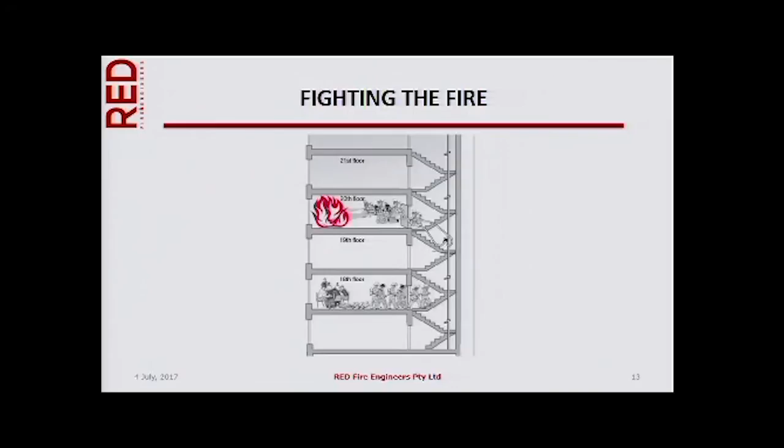In Grenfell, if you read some of the first accounts by the fireys, they talk about getting up to the 15th or 16th floor and running out of air, then having to go back down to get another air bottle to go back up to the 15th floor. How are they supposed to get higher up and rescue people? They said to themselves, do I keep going without oxygen and have to be rescued myself, or do I just leave those people to themselves? Some fireys went up another 2 or 3 levels and then gave up. Can you blame them? Of course not. That's the challenge of fighting fires in these buildings. Our normal way of fighting a fire is setting up 1 or 2 floors below the fire floor. We can't do that with these facade fires.

So this is Melbourne—this is home, we don't have to go overseas. By the way, this is not our first facade fire. I found pictures of facade fires in the early 90s in Sydney. Bankstown—you remember the Bankstown fire a few years ago where the 2 girls jumped? One died, one became a paraplegic. Do you know that last year they had a facade fire? The front of their building was an aluminum composite panel. It had another fire. Luckily, it was set back from the tower, so the fire didn't go anywhere. We have facade fires right here in our backyard.

My colleague Blair Stratton was taking the train into the city on the 25th of November because he was giving that talk with me at Engineers Australia. I said to him, when you're at Southern Cross, lean out the window and take a picture for me so I could add this to my slides.

This was a horrific fire in some ways, but not so bad because no one died. Some would argue that it shows how amazing our building regulations are - the purpose is to save lives, and no one died, so the building regulations were fine. Or did we get lucky?

We had so many challenges in this fire. There were 400, 500, we don't know how many people were in the building. Can you imagine a 2-bedroom apartment with 12 occupants? Can you imagine bunk beds with a time schedule on the bed for what shift people are going to sleep? Welcome to Melbourne - I hope none of you are living like that. Don't raise your hands if you are.

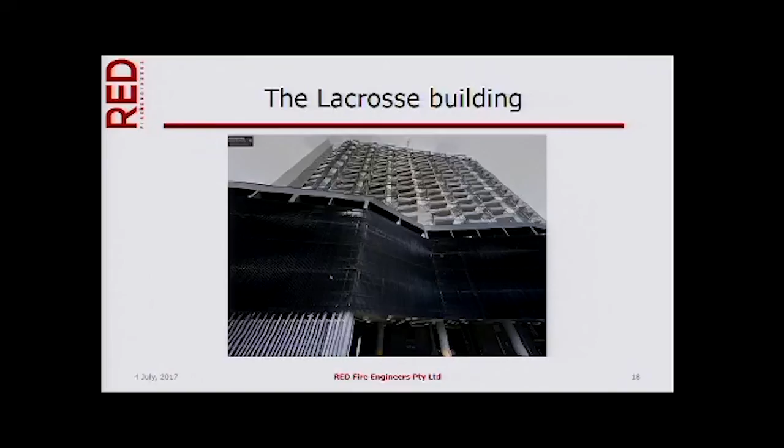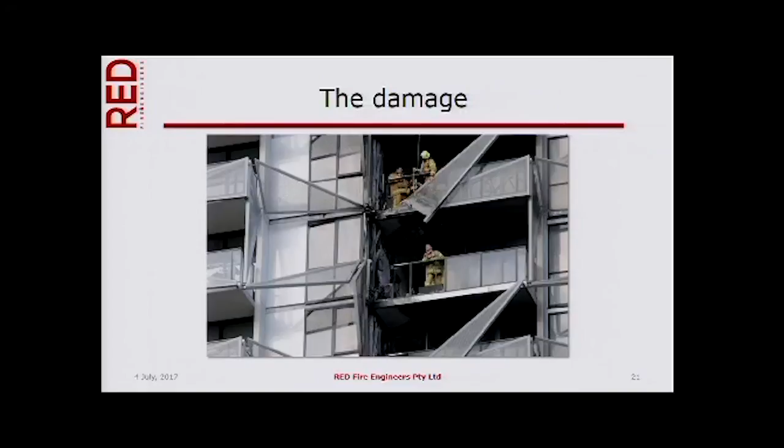The brigade had its challenges dealing with the aftermath. We're going to come back and look at these pictures because they tell a lot.

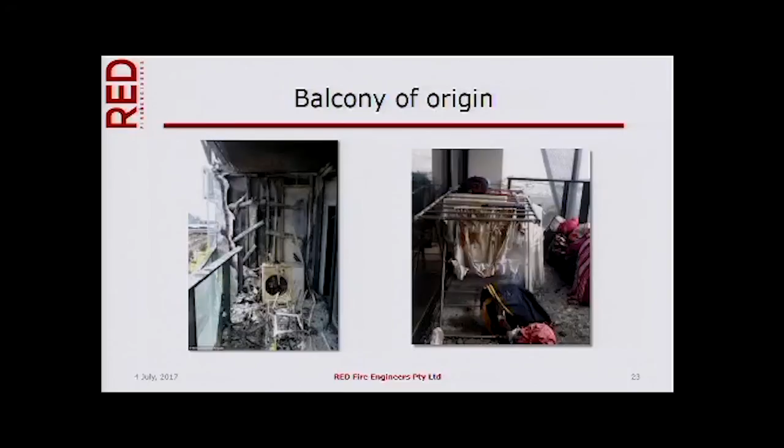After the fire, they took the pieces of aluminum - pretty stuff. I hope no one from the architectural firms is here, but if so, I'm insulting you, I apologize. The stuff that makes buildings pretty is not of great interest to me as an engineer, other than the engineering to keep it up and keep it safe.

They don't have a glass balustrade problem on the left - they have a plywood balustrade, which is sort of interesting. Is that livable? Well, you can't fall out, so I guess that's all right. Should we put people behind plywood balustrades? Why not?

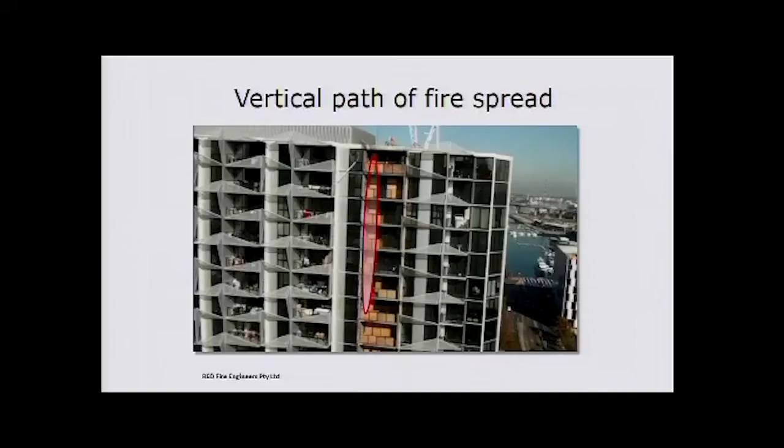So the fire actually went up - see where that red oval is? The fire went up sort of in that area. That's why you see all the plywood balustrades. That red arrow is pointing to the corner of the aluminum composite panel facade where the fire was able to go from its origin all the way up to the top of the roof.

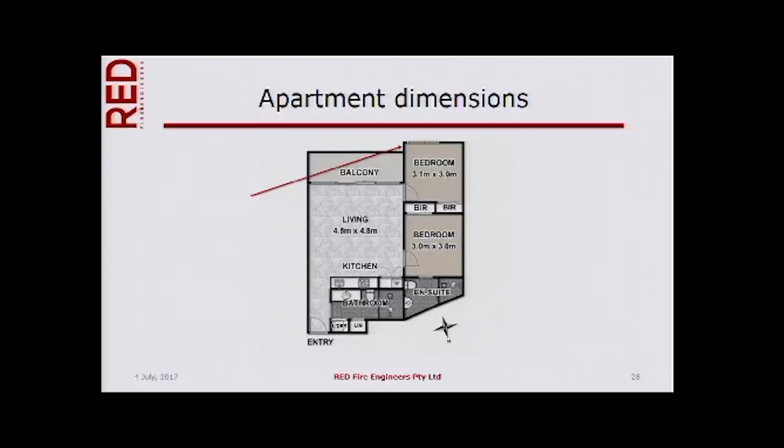You get a better handle of that, and you get an idea of the size of the bedrooms - fairly large for Melbourne these days. That was funny, no? All right.

The building is sprinkled - where are the sprinklers? The sprinklers are below the ceiling. The combustible ductwork is above the ceiling, between the ceiling and the floor slab, so in this interstitial space.

But that's okay, because a fire in the living area would have to bypass the sprinkler system to get up into that space, unless the fire started in the balcony and then entered through this grill. Oh, I hadn't thought about it. It won't get into that grill unless there's a fire source out there, such as a combustible facade.

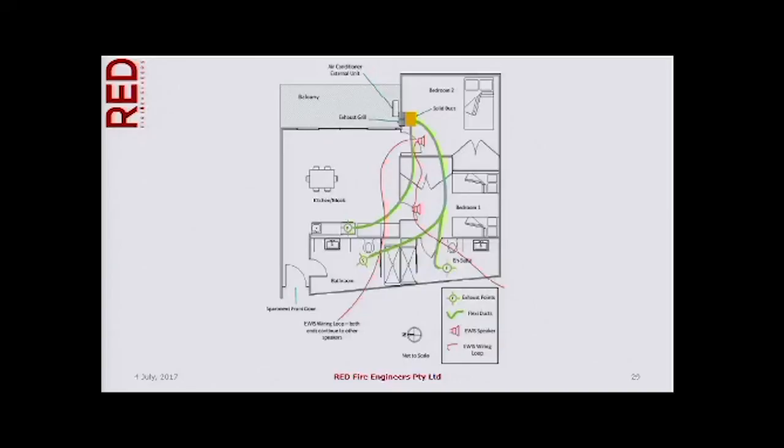In my building, which is also in Melbourne, the same fire engineers said, look, we're not worried about a fire getting into that space, so we don't have to have any fire resistance between one apartment and the next because it's sprinkled and there's a ceiling and we can't get above the sprinklers with a fire. So we'll just put a little smoke separation. We won't actually seal the penetrations. It's not a problem in Melbourne. I think Lacrosse says it is a problem. Interesting.

The building was sprinklered, and there were sprinklers in the important rooms. So if you think about a fire that started in this balcony, if it burns through the wall behind the air conditioning unit, you've got a sprinkler head to control it, which is great. If it breaks through the glass, you've got a sprinkler head here to control it, and that's great too. We'll come back to the sprinklers.

One of the things you read in the press is that our buildings in Australia can't have the London fire because we have sprinklers everywhere. Well, if the building's over 25 meters, we might have sprinklers. Not all buildings over 25 meters do, but most of them.

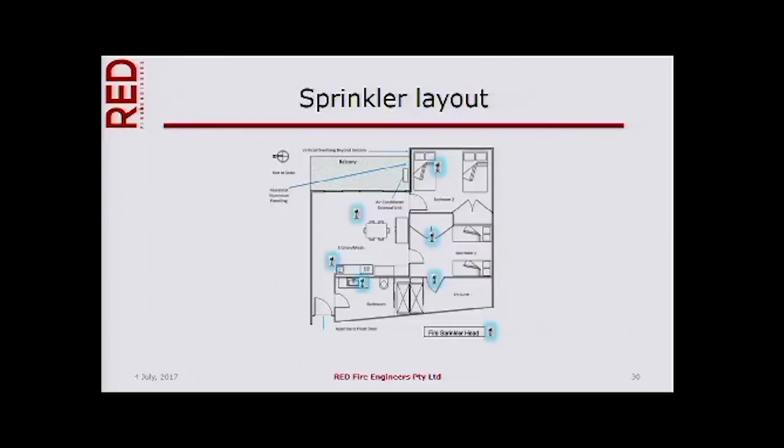So how did the fire start? Well, without mentioning names, the builder says it's the guy who started the fire that caused all the problem. At least that's what the newspaper says. An occupant was sitting out on the balcony smoking, and he put his cigarette out in an ashtray. The ashtray happened to have been made of a yogurt container.

He'd been using that yogurt container all his life. If you know anyone who smokes or have ever smoked yourself, have you ever seen anyone put a cigarette out in a plastic container? Come on, raise your hand. Thank you, lots of hands go up. So is this an unusual thing to use for an ashtray? No. Is this something we should expect? Of course. This is how people live. We should be designing how people live, not how we think they should live.

All right, fire started. The ashtray, the yogurt container, melted. The contents spilled, and a little bit of flame ignited some papers. Oh, terrible, he's a slob. He left paper everywhere. You've never left a piece of paper on your balcony, have you? Well, I have. I'm a slob. I told you that already. The fire got behind the air conditioner, ignited the cladding behind it, and that's all it took.

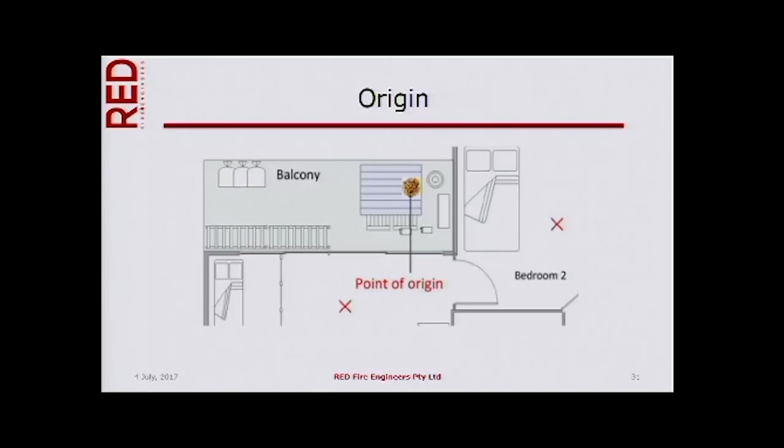We'll come back to that in a second. So this is what the apartment sort of looked like. Here's the air conditioner. The fire got behind there. Not bad looking apartments. Not bad until you have the fire.

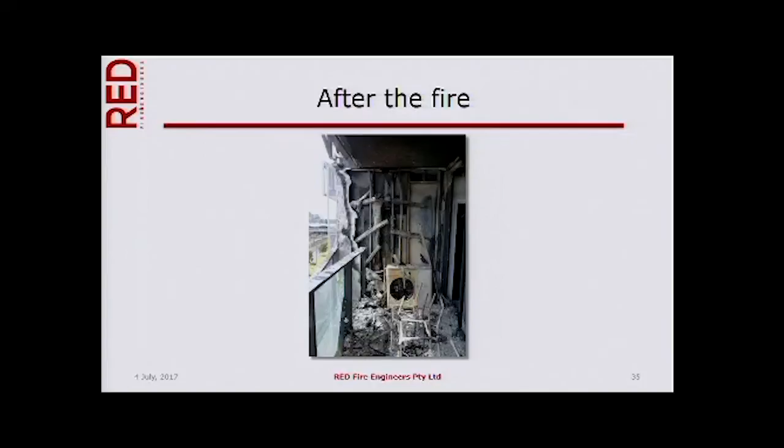All right, you can see through into that bedroom. So there was cladding, some insulation, plasterboard, and fire burned through that, got into the bedroom, the sprinkler stopped the fire. All's good, except the fire got into this cladding and went right up to the top of the building.

Do you expect values to decrease if people know there's been a fire in your building and it's in the paper? Absolutely. If they know your building has a non-compliant facade, do you think you can sell your apartment for as much money as before they knew it was non-compliant? I can tell you from my building, that's exactly what has occurred. What is the cost? For Lacrosse, $6.5 million of fire damage, including $700,000 of water damage. So those bloody sprinklers put water everywhere.

26 sprinkler heads operated. How many heads do we expect to operate before we normally run out of water? 8 to 10, even in a combined system. Wow, how come they still worked? Well, they worked because the fire was at 2 in the morning. No one in Docklands is using water at 2 in the morning. Guess what time people start using water? Around 7 a.m. when they get up.

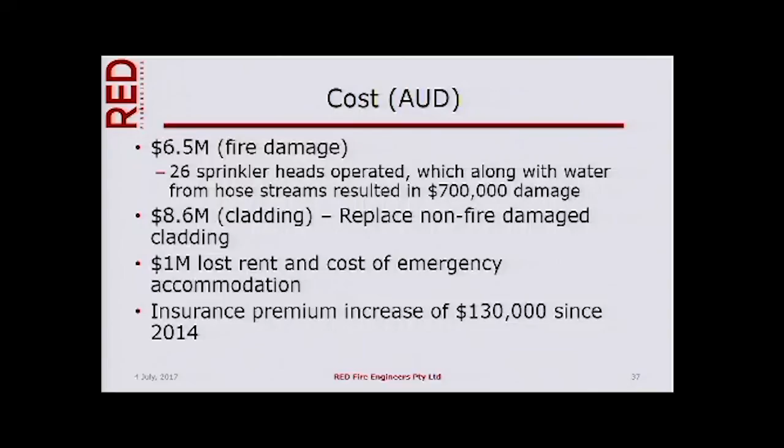What are the other costs? $1 million in lost rent, cost of emergency accommodation, $8.6 million in cladding costs. Insurance has gone up an increase of $130,000. In my building, which has 324 apartments, the Owners Corporation's insurance this year is going from $35,000 to $70,000 because of non-compliant cladding. And we hear that time after time after time.

All right. So this is a Class 2 occupancy. We need Type A construction to meet the deemed to satisfy requirements.

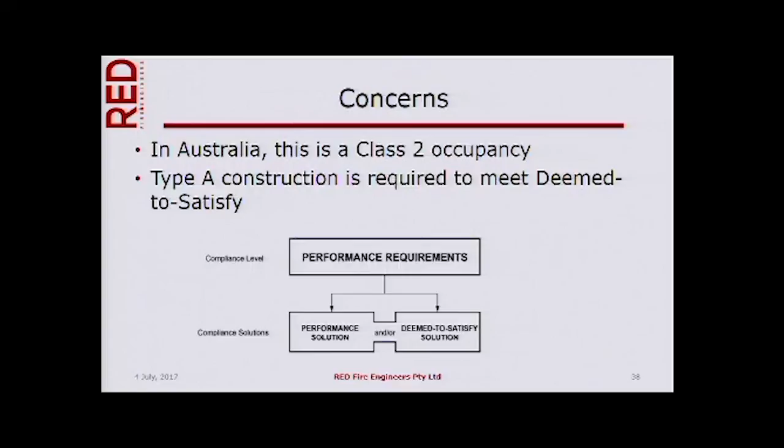I'm just going to take a second to remind you there are two ways of meeting the performance requirements of our building regulations. One is through a performance solution, and the other is through a deemed to satisfy solution. The deemed to satisfy solution is the only one that tells you how to build things. The performance solution is something a fire engineer comes along with, and says, in order to meet the performance requirements and expectations of society, and of the building code, here's how you can do it. I'll come back to that again in a minute.

All right, you all want to know about Grenfell Tower. As I promised you, I'm not going to tell you anything you can't find online. I wish I had more information. I don't at the moment.

Do we do that in Australia? No. We do not build buildings structurally the same as they do in the UK, with a few exceptions. There are engineering firms who particularly practice internationally—Arup, for example, is one—and their designs will really look at the performance requirements and do what's needed. But all too often here, we do the minimum that's needed, what our building regulations call for.

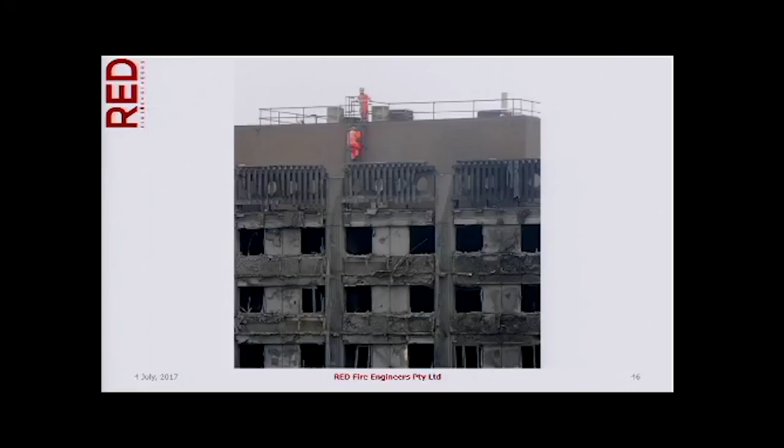There are two absolutely great articles in the New York Times. Just look up Grenfell Tower, June 24th. That's all you have to remember. Or you can take a picture like he did.

Nate, I don't know. Bloody Americans. Thank you.

These are really, really good articles. They're written by the same reporter who wrote most of the articles in the New York Times after 9/11. It's top-notch research, and I highly recommend them.

One of the things they put together were some graphics of the cladding. Basically, we had a concrete wall, an insulating panel, a 50 mil gap—2 inches if you insist—and an aluminum composite panel. That's what the facade looked like. From a practical viewpoint, based on what we saw, there was very little evidence of successful fire stopping within that space. Once a fire got into that space, it just spread through the building, both vertically and horizontally.

The details of fire stopping, what existed or didn't exist, we're all guessing at right now. I can only tell you that whatever they tried to do, if anything, didn't work. I can only talk about the outcome, but I can't tell you why.

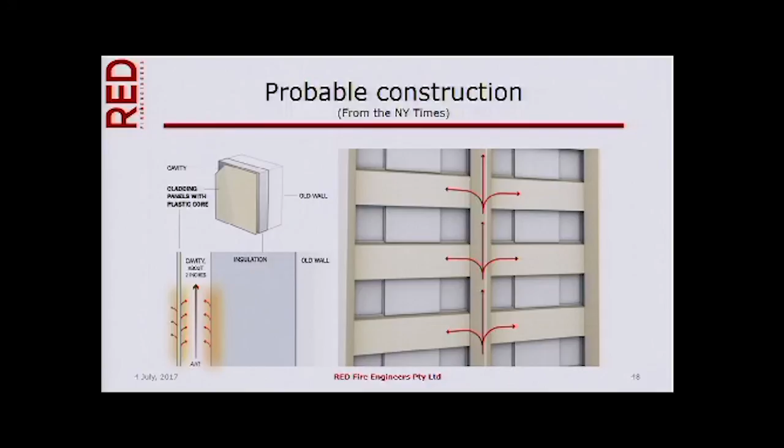The other thing you'll read about is gas explosions and other problems in the building. We have no evidence of that. We have tenants who said there was a gas pipe exposed in the stairway, but we don't actually know if that was involved. Explosions could have just been from a paint can someone had in a bedroom.

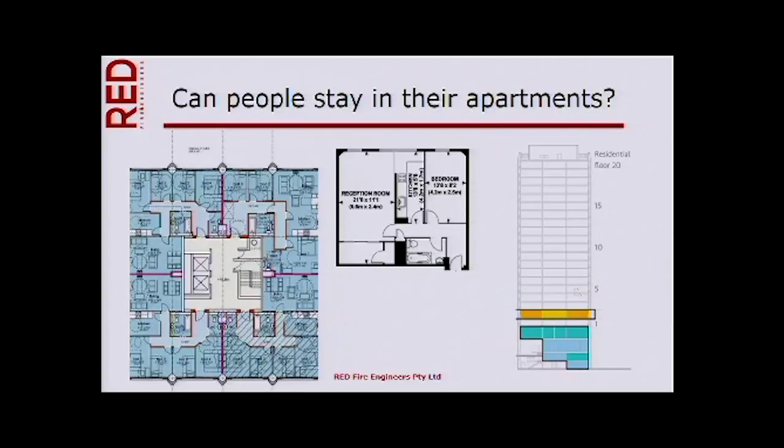What I do know is that the British have said, oh my God, we've got a huge problem. We're going to look at our public housing stock and make sure they're okay. So they decided to do an audit of 600 buildings, and it's going to be thousands of buildings now as they continue to look.

If you read in the press, you'll see none of the buildings have passed. Passed what? Well, they've done a combustibility test, and we'll talk about that in a minute. The Australian version is AS 1530 Part 1. It's a little bit different from the British, but close enough.

We know that Grenfell used an aluminum composite panel with a polyethylene core, and behind it was what's called PIR foam insulation, a Celotex RS5000. Those are facts. That's about all we know right now. We do know they did not use an aluminum composite panel that was fire retardant.

If they had, would the outcome have been different? So I've been trying to find what's the relationship between having this aluminum composite panel and insulation and a gap and a fire between them. And I actually don't know how that FR product will behave.

I do know how the polyethylene product behaves. It doesn't do well. I do know that the polyisocyanurate foam panel, which is that Celotex panel, when it's next to a high radiant flux like you get from the aluminum composite panel, doesn't do well. I don't know what happens when you start changing things around. We don't have that information yet.

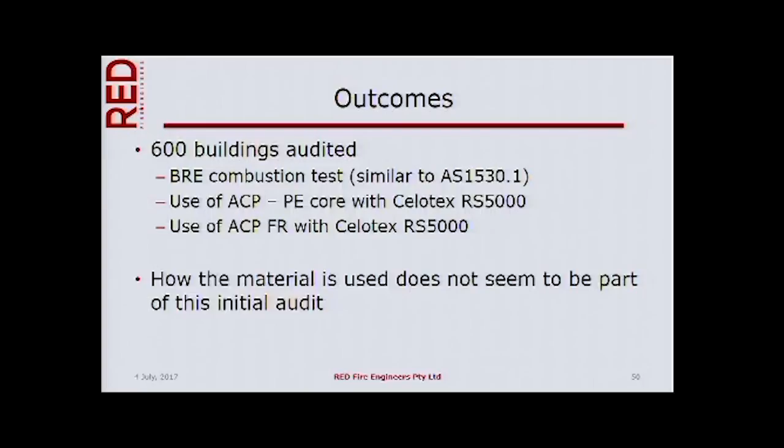Anyway, the important thing is the British have said, if we see anything combustible, we're going to panic and take people out of the building. How the product is used doesn't seem to be part of the initial audit, although I understand they're finally starting to hire some real engineers, fire safety engineers, who are starting to look and say, yeah, well, maybe this is okay and maybe this isn't.

All right, can I show you pictures of buildings that look like this in Melbourne? Could it happen here? This is a quote from the CEO of the Australasian Fire Authorities Council. There's a national requirement of the National Construction Code for all buildings above 25 meters, nominally the height accessible by fire service ladders, to be serviced with sprinkler systems, something that was missing at Grenfell Tower in London. Australian high-rise buildings have a requirement for 2 fire escape staircases, alarms and detectors throughout, and for occupants to conduct regular fire drills.

So, if you live in an apartment, how many of you have ever done a fire drill?

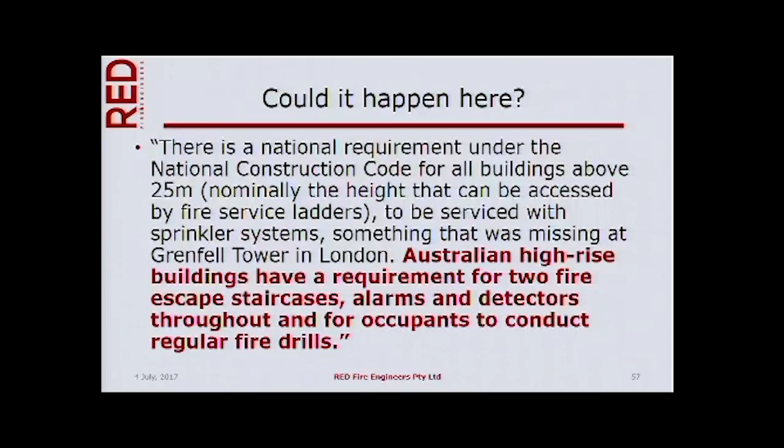So in my view, could Grenfell happen? I think it could. We had a lot of sprinkler heads operate. Imagine if it had been in a different part of the city where the water supply wasn't as strong. Once the sprinklers were overrun, there's nothing to stop the fires from spreading into the building. The fire happened at the right time of night. And you saw from the pictures I showed you of all the fire trucks lined up on the roadway, there were elevated roadways. They got to jump on the height of the building.

Are we doing anything? Okay. We did a VBA audit of 170 buildings in the CBD. A little over half were non-compliant. Wow. Are these unsafe? I don't know. They don't meet the deemed to satisfy provision of the building code. Does that mean they're unsafe? No. We have to ask, do they meet the performance requirements?

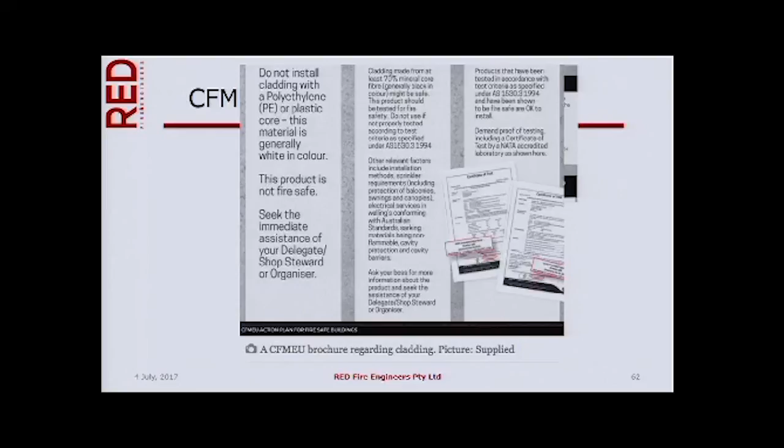I'm sorry, I couldn't resist adding the CFMEU to the slide. Why would I do this? Because, as you read in yesterday's paper, they feel that our buildings may be unsafe, the ones they are building, so much so that they've told their guys to keep an eye out for unsafe cladding. I'm sorry, the world's upside down when we're depending on union workers to inspect our buildings and make sure they're safe. Or maybe we're in a wonderful place where we're all coming together to work together on this, which is the way I'd rather look at it. But wow, have we lost so much confidence in our systems? Maybe we have.

Well, life doesn't stop with the CFMEU. There's an urgent probe just been announced where we have a Liberal former premier and a Labor deputy premier coming together. Wow, this is amazing. Never would happen in America, that's for sure. To work together on this problem.

We have the current chair of ABCB, and we have an architect who are also politicians who are recognizing we've got to do something and do it right away. And we have a Minister of Planning who's saying there's nothing more important than public safety and for people to have confidence that Victoria's buildings are constructed properly. Well, I can tell you they're not all constructed properly, but many are. But we don't actually care about the ones that are right. We care about the ones that aren't, and how do we identify them? And that's sort of our challenge, isn't it?

Because that goes back to why we're all sitting here, the lessons learned from London. Let me go back to Lacrosse for a second. The first thing that the municipal building surveyor required was that the essential safety measures be reinstated. So remember I said that the alarm system, the speaker wire was damaged, so that had to be fixed. They also said no more overcrowding allowed. Although in the paper I just read there's some overcrowding, but I don't even know how we control that. Limited storage on balconies, but if you go by the building, you'll see people don't seem to be paying attention to that.

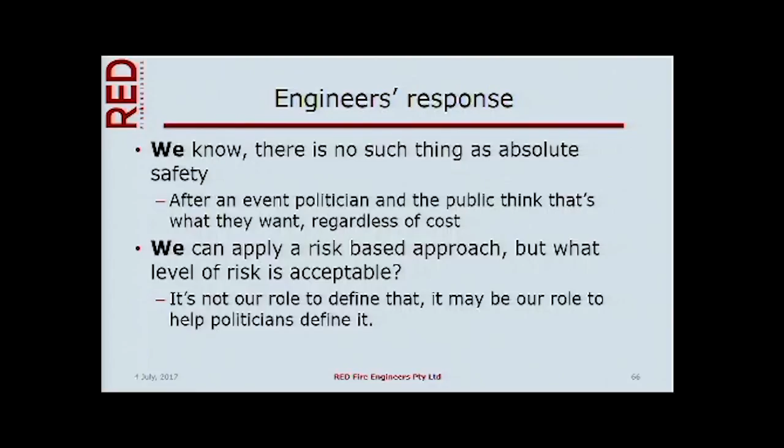It's not for us as engineers to decide. It's really for politicians, but they need some information so they can help define what an appropriate level of risk is. So we as engineers may be able to assess or determine the probability of an event or the consequence, but who's willing to pay for it?

Who's willing to pay for our analysis? If we were designing a nuclear power plant or a chemical plant, we get paid to do that. Do you think we actually get paid to do this for an apartment building in Melbourne? Absolutely not. Could we do it if you gave us enough money? Sure. Is that something we should be doing? Maybe.

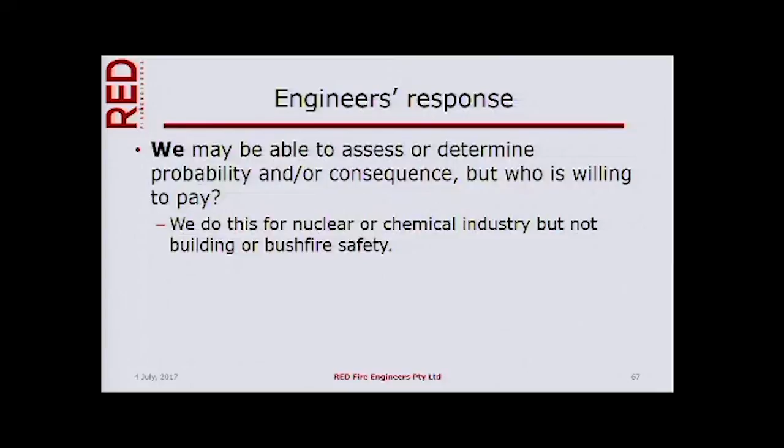It's also not our role to trade off one risk for another. A friend of mine said, we can make hospitals a lot safer, but if we do that, maybe they won't have enough money to buy the latest CAT scan machine or the latest robot for operations. Think of all the lives they could save with that versus what we put into fire safety in the building. Well, again, that's not for us to decide. That's something where we need politicians who can actually come together on this. This is where ABCB, as a governmental agency, should be providing information.

All right, so what are our facade safety regulations, and how do they address Lacrosse and Grenfell? And why have we been using non-compliant material in designs?

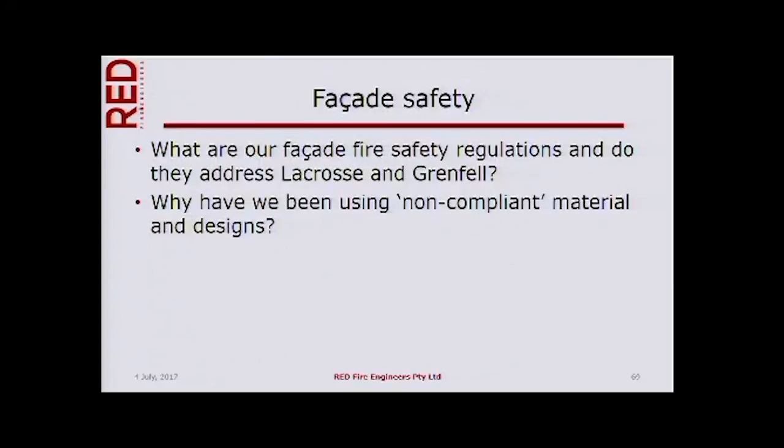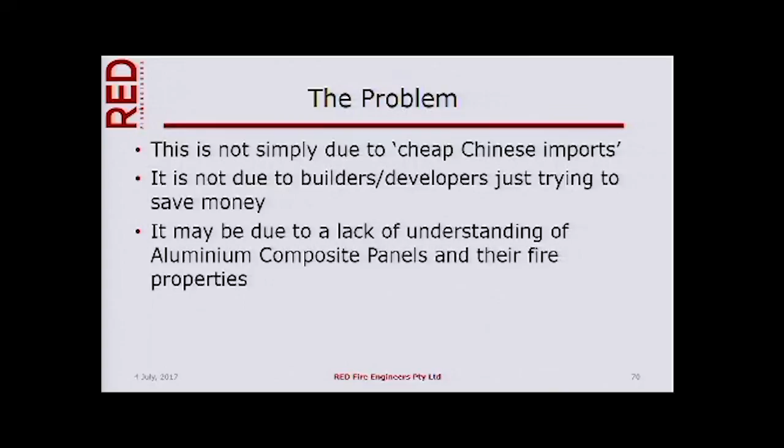I just want to make it clear that the problem is not simply due to cheap Chinese imports. You can argue that I'm wearing a cheap Chinese import - I paid a lot for my Apple Watch, right? So it's not just because it's from China. It's not due to builders and developers just trying to save money. I think a lot of it is a lack of understanding of the risk of aluminum composite panels.

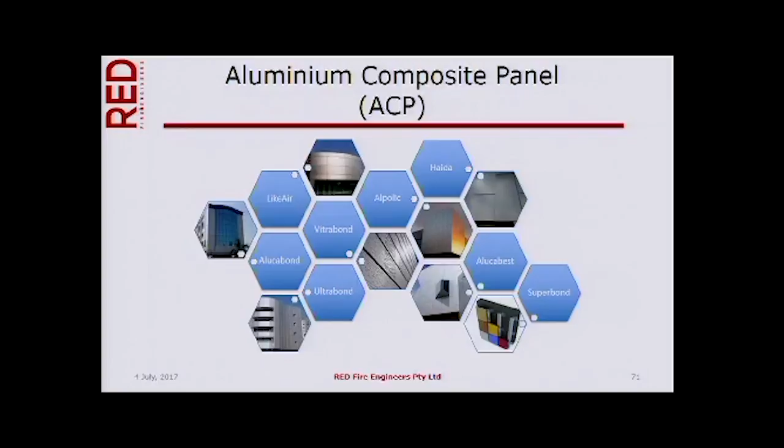And there are lots of them, all right? But if you take a panel like used in Grenfell with a polyethylene core and compare it to a panel like Alucabest that we had in the Lacrosse Tower, it doesn't matter the brand name, it doesn't matter where the panel was made, it doesn't matter where the polyethylene was made - polyethylene just knows it likes to burn. So when you have two things that are chemically the same, they're going to burn and behave the same way.

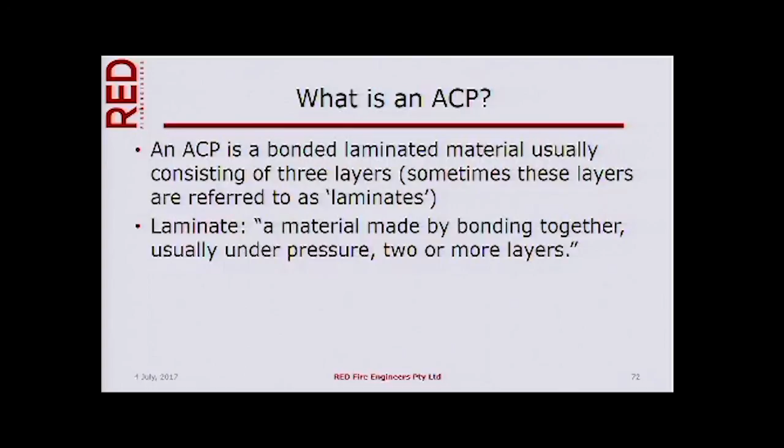So what is an aluminum composite panel? It's a bonded laminated material. The building code refers to the layers as laminates. Our building code is unique in that extent. There are typically 3 layers, but there's paint and other finishes we see on panels. We talk about the 3 major layers, the 2 sheets of aluminum and the center core, because those are the primary components.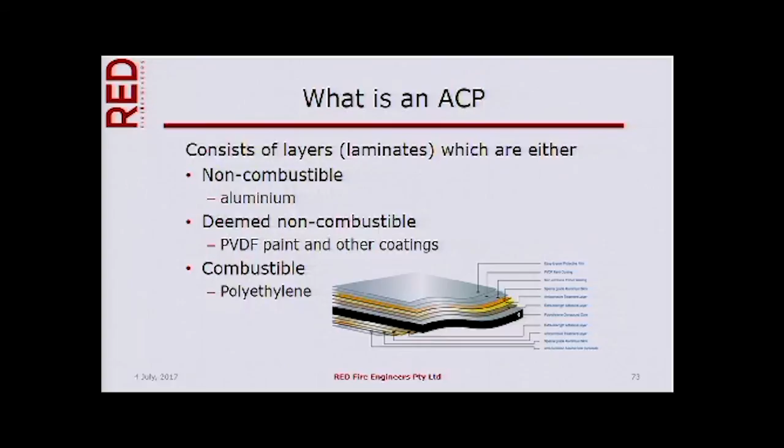From a fire viewpoint, what do you think is going to burn more, a thick core of polyethylene or a little bit of paint? Obviously it's the polyethylene. So we ignore some of the other products. The stuff is lightweight, has beautiful skin properties, works really well to keep the weather out. It's easy to install, it's pretty, it's attractive, architects love it.

So now I'm going to regress and talk a little bit about our building regulations and the deemed-to-satisfy requirements for paneling.

The building code looks at 2 situations. One is where the cladding is part of the external wall, and one is where the cladding is an attachment. If it's part of an external wall and it's type A construction, then it must be non-combustible, as defined by the building code. If it's an attachment, well, maybe it can burn a little bit, and we'll talk about what that means.

So when we look at a building code, the first thing we do is we read the definitions in the code. If something is not defined in the building code, there have been 2 court rulings, one here in Victoria and one in New South Wales, which say you go to the dictionary. Now, you're not allowed to go to your favorite architect's dictionary. Do I have any architects here? All right, don't mean to pick too much on you. You're not allowed that. Okay, good.

You're not allowed to go to the American Webster's Dictionary. You're not allowed to go to the Oxford English Dictionary. You go to our dictionary, Macquarie. And Macquarie says that a wall - it gives a definition, goes on for the 3rd definition - anything which resembles or suggests a wall. I love dictionaries, don't you?

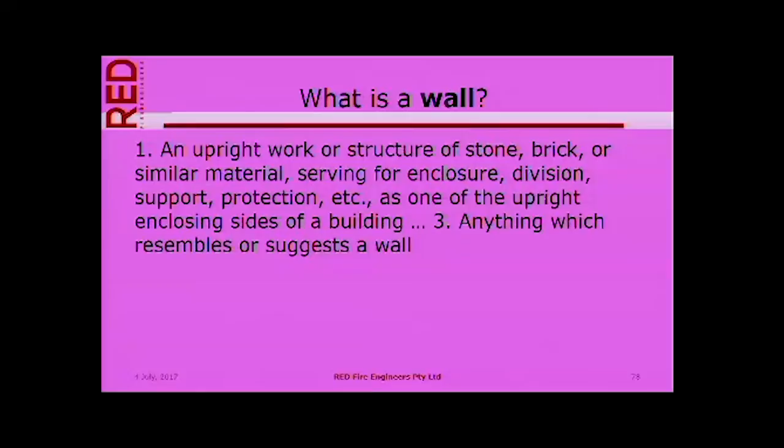The ABCB have defined an external wall as a wall that's not a common wall, like a wall between two units, for example. The integral components are external cladding, framing, spandrels, insulation, and internal lining. So basically, you start on the outside of the wall and work your way in until you get to the inner surface, and that's the wall.

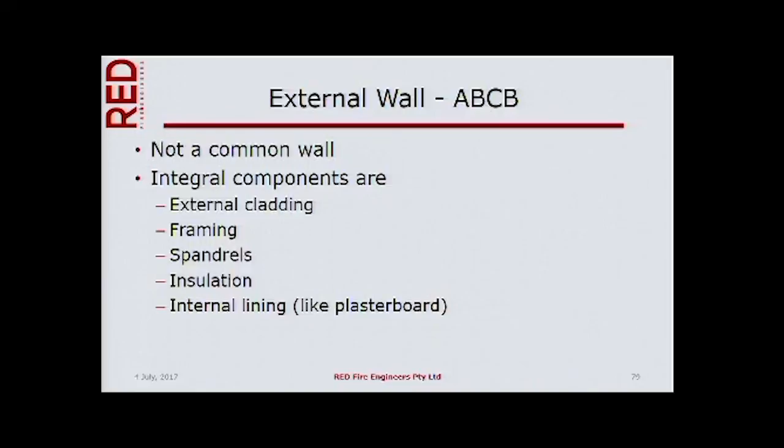Does this sound shocking or surprising to you? I hope not. There's actually an ABCB policy document you can get on the website under education.

What's an attachment? The dictionary definition that applies is an adjunct or supplementary device. Now remember that definition, adjunct or supplementary. That means you can take it off. That means it's not critical, right? That's what those words mean.

Now why do we care? All right, so here I get put on my professor hat. Although it's been a few years since, it's been 10 years since I was a professor. It's kind of exciting.

We have a history of providing non-combustible exterior walls with a fire resistance level. This is the grading of buildings document, published in 1948 in London as a response to the fires that occurred during the Blitz. So what happened during the Blitz? It wasn't just the German bombs that caused the fires, but combustible facades and buildings too close to each other, causing easy fire spread from building to building. So we put together a building code in 1948 to keep our cities from burning down and prevent fire spread via the facade.

So now we're going to turn back the clock. Many of you know about the Code of Hammurabi, where if you built a bridge, we made sure the bridge worked because you put the builder and his family under the bridge and drove over it to see what would happen. Don't get ideas with your local builder, please.

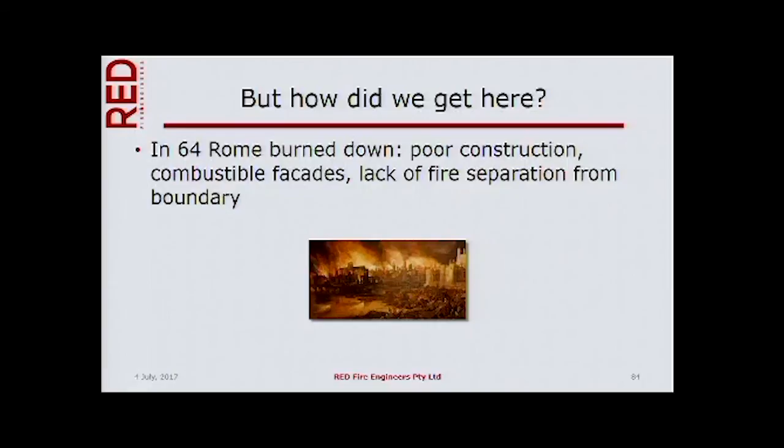We, of course, learned our lesson. And 1,600 years later, there was a great fire in London. Why did London burn down? Buildings too close to each other, combustible facades, lack of access for the fire brigade. I wonder why they wrote their own code, all they had to do was translate the Roman code from Latin into English. The problem hadn't changed in 1,600 years, we just forgot the problem.

In 1871 in Chicago, can you imagine, 17,000 buildings were destroyed. This was the fire started by Mrs. O'Leary's cow, she kicked a lantern over. And why did the city burn down? Combustible facades, buildings too close to each other, lack of facilities for the fire brigade. Am I starting to sound boring? I apologize.

The bottom line is that throughout modern history, the adoption of updated building codes is a response to a fire rather than in anticipation. There are a few examples, a few minor changes to building codes, but the big changes happen when we have a fire. Did they happen because of Lacrosse? No. Are they happening because of Grenfell? Yes. Sadly, you have to have a shock to get changes.

Now going back to our code, deemed to satisfy. If the cladding is part of the external wall, then one of the first things I ask as a fire engineer is, I wonder if I need an FRL. So I go to the building code, and I notice there's a table which says that if the wall is load-bearing, then I always need an FRL. That's what the 90, 60, 30 column means. And if the wall is not load-bearing, and it's more than 3 meters from a fire source feature, like the boundary, then I don't need an FRL.

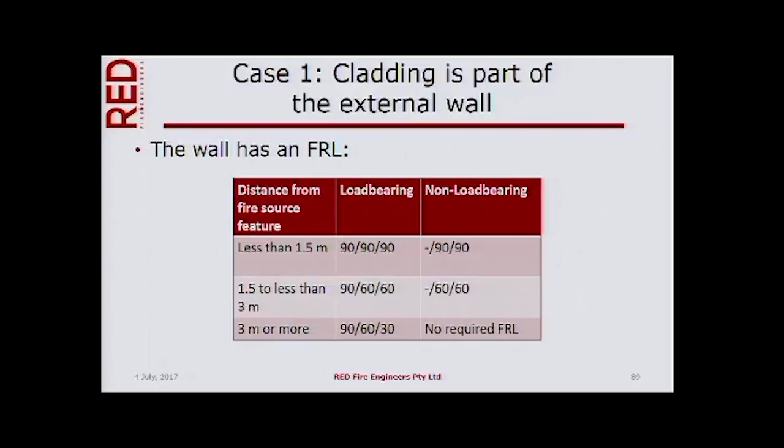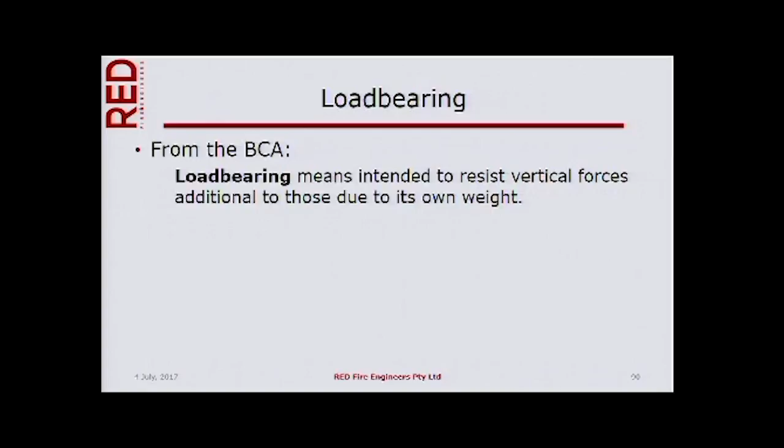The BCA defines load-bearing as meaning intended to resist vertical forces additional to those due to its own weight. So if I have a wall, and I have cladding that is part of the wall, then the wall doesn't necessarily have to be load-bearing. If I have a wall, and the cladding is an attachment, separate from that wall, and that wall is carrying it, guess what? The wall becomes load-bearing, as defined by the BCA. Wow, this is where people have gotten confused.

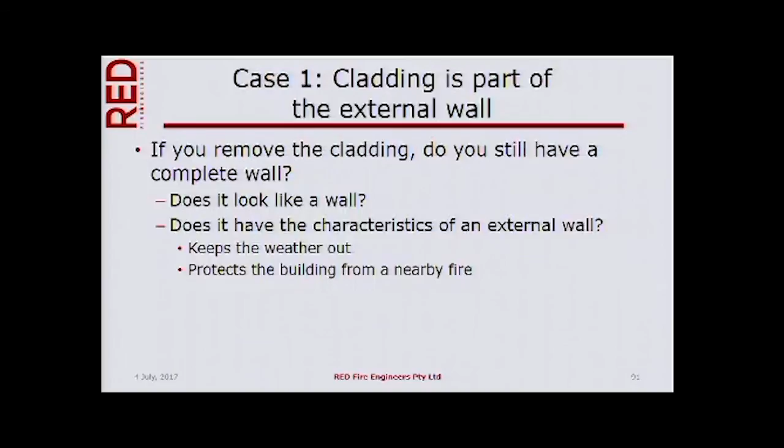Another way of deciding if the cladding is part of a wall or an attachment is to ask: what happens if I take the cladding off? Remember, an attachment, as defined, is a supplementary or adjunct device. So if I take it off, I should still have a wall. It might be ugly, might be concrete, yuck. Or it might be something else that looks terrible. But does it still have the characteristics of a wall? Does it keep the weather out? Does it protect the building from a nearby fire? All these things that walls do.

All right, so I've been talking about combustible and non-combustible. How do I know if something burns or not? Well, I'm not allowed to guess. I'm not allowed to use my own backyard experiment. I go to the building code. If I'm starting to sound boring again, I apologize, but it's all in the code. You have to read what the code says, and you have to look at the history and background of the code so you can understand it.

The building code says it's combustible if, under AS 1530 Part 1, 1994 version, when you test it to that standard, it's deemed combustible. Basically what you do is take a sample half the size of this glass, put it into a furnace at 750 degrees, and look to see if you have any flaming that lasts more than 5 seconds, or if the furnace temperature increases more than 50 degrees, or if the specimen temperature increases more than 50 degrees. If it does any of those things, it's combustible according to the test. If it doesn't, it's non-combustible by definition.

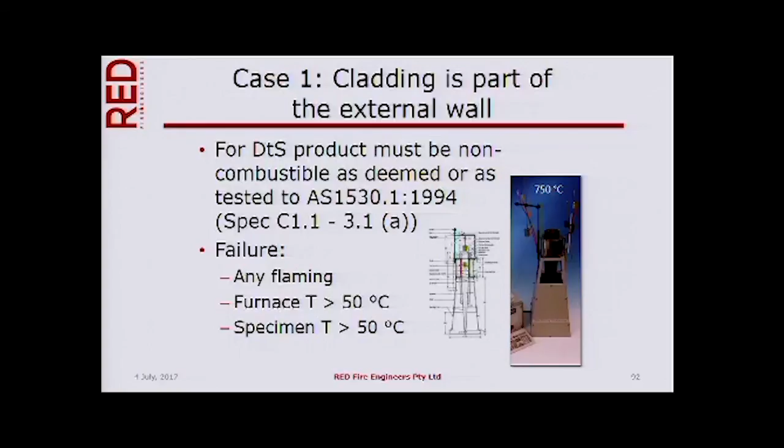Oh, what about cladding? The test standard actually says the method is not applicable to products which are coated, faced, or laminated. So you can't use AS 1530 Part 1 directly on a piece of aluminum composite panel. Instead, the standard says that in such cases, tests may be carried out separately on the individual materials from which the product is formed. So you don't take the whole piece of ACP and put it into the furnace. Instead, you take it apart and test the 2 sheets of aluminum and the center core.

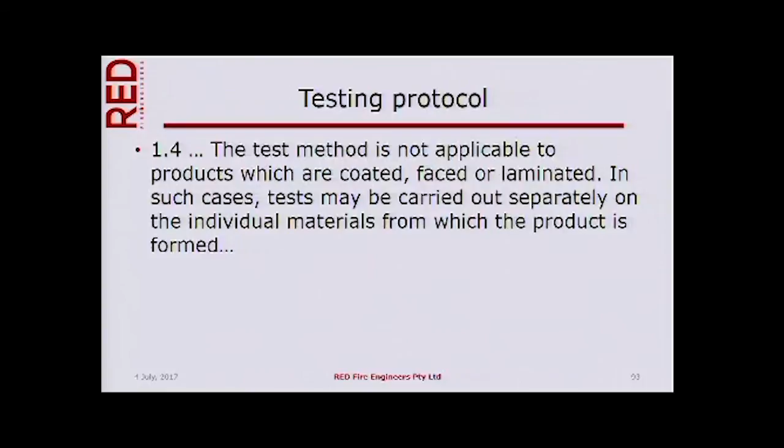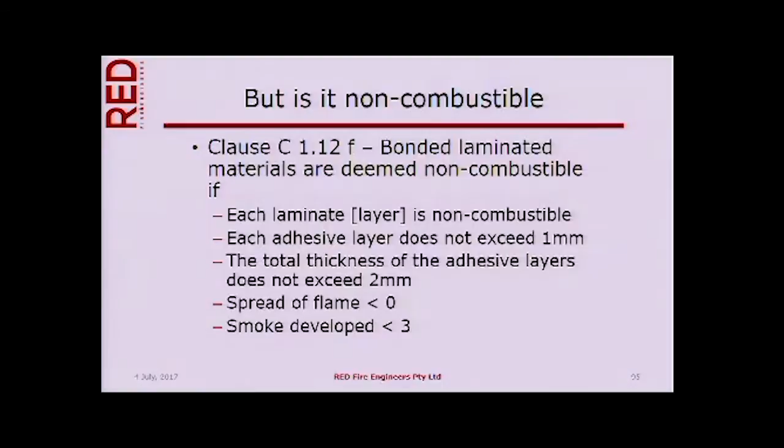So the building code says, if all of this is true, then you can use the product wherever you can use a non-combustible product. Let me give you an example. Here is a piece of aluminum composite panel with a hole drilled in it. What do you see coming out of the hole? A power cable. Now, I of course had an electrician come and unscrew the light that was on the other side of this cable, I have to follow the law very carefully. This was on my balcony, it is on my balcony. Now what do I see? I see an almost black center core.

If it's polyethylene, well, if it's black, it's always polyethylene. If the core is white or off-white, it might be polyethylene, or it might be a fire-retardant material with mineral fiber and inert filler. But if it's black, it's always polyethylene.

So this was an aluminum composite panel with a polyethylene core, and what has the wonderful builder done? He's drilled a hole to expose the fuel, the polyethylene. And what else has he done? He's put a heat source, called an electric light, on it. So if I have a failure in my light, it'll be easy to ignite the panel. It was so nice of him to do that.

By the way, just a meter above this is the vent that goes into the interstitial space above my ceiling. So a failure of this light can result in the sounders in my apartment not working and telling me that there's a fire, and smoke and fire spreading into the apartment above - except I'm in the penthouse, so there's no one above me. Thank God.

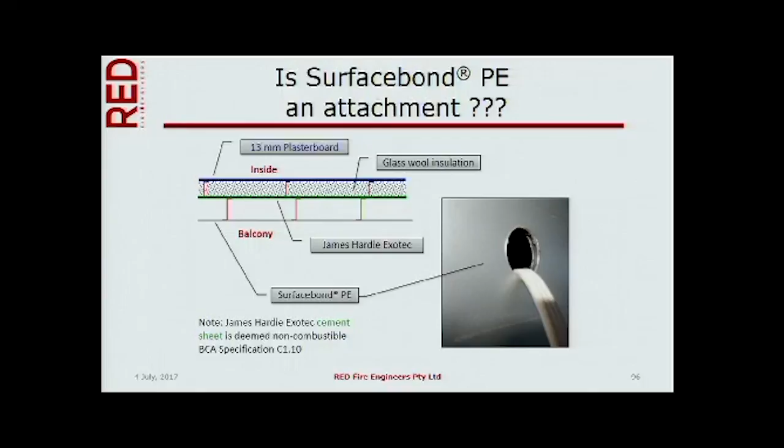The James Hardie system has excellent resistance to water penetration, high wind loads, and is suitable for exposed applications. So think about that - if I remove the ACP, guess what I'm looking at? A wall.

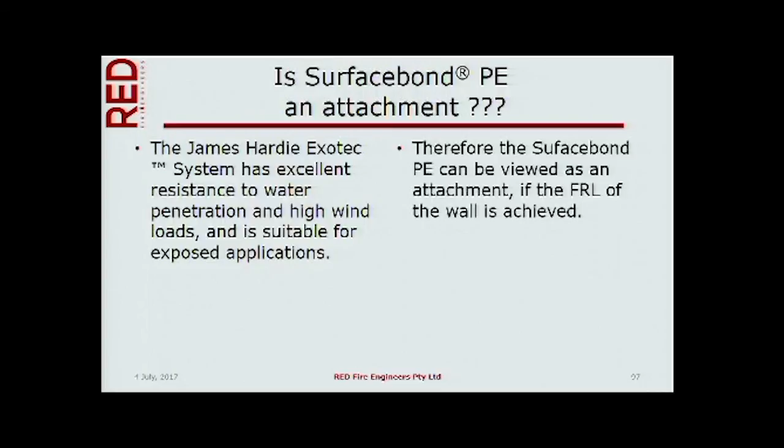Oh, wait a minute. If this James Hardie system is supported off the rest of the wall, that wall has to be load-bearing and have an FRL. Does it have an FRL? All right, well, the answer is no. But it gets more complicated than that.

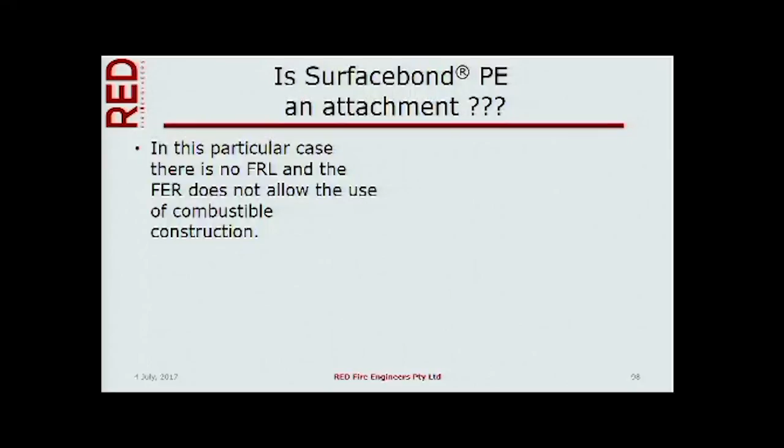The fire engineer omitted sprinklers from my balcony, and in his wisdom, he did so. He required that no combustible materials be used in the design of the balcony or the facade - it's in his fire engineering report. Do you think the facade engineer was given the fire engineer's report? Of course not, why would he? Who would connect the two together? The architect should have. The builder should have. But it's not something that's normally done.

Anyway, this wasn't compliant. Why is that flashing? Trying to give me a message. Very strange. So another part of...

Another part of the building has a wall where there's an aluminum composite panel, then a PIR insulation - happens to be a panel, so it's not as bad as Grenfell - then an air gap. Doesn't this sound just like Grenfell? Very close.

This is in my apartment building, and it comes all the way to ground level where a car, for example, could hit it and start a fire. A skip could be down there, start a fire. Lots of ways of starting fires. And they would be up in my apartment within 5 minutes.

But there's a glass wool insulation - that'll melt, get out of the way. But there are 2 layers of 16 mil plasterboard. That's cool then. What do you find in plasterboard? You find power points, I'm sure there's a power point there. What's behind the power point? A fire-rated box, right? Not in my apartment.

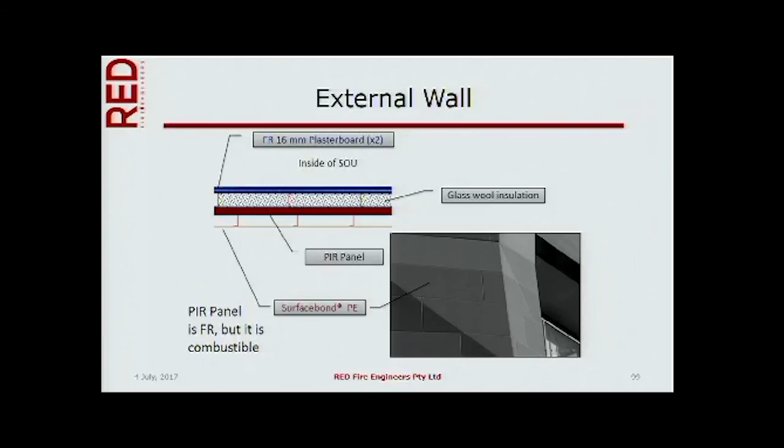The fire engineer said, don't worry, non-combustible external walls, there's no way a fire is going to come in. His design didn't include the fact that they were putting all this risky material in my building. By the way, I did spend $1,500 to put fire boxes behind all my power points, and I recommended my neighbors do the same.

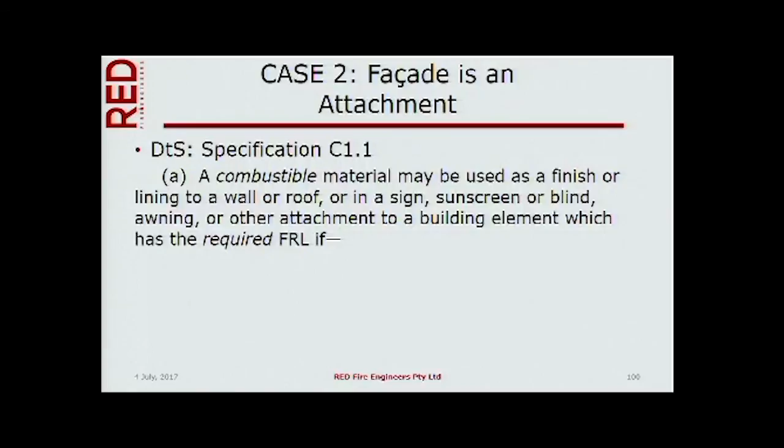All right, let's move on. Let's say the facade is an attachment. So a combustible material may be used as a finish or a lining to a wall or roof, or in a sign, sunscreen, a blind, awning, or other attachment to a building - a supplementary or adjunct device - which has the required FRL, if, and then there are a bunch of requirements.

Let me just go back to Lacrosse. Notice that if you take - this is sort of the remains of the ACP - behind this is the plasterboard. So if I remove the ACP, I could actually see into the back of the plasterboard. Was this an attachment or part of the external wall at Lacrosse? It's part of the wall, no question about it. All right, so moving on.

Was this combustible?

Probably. I doubt it passed 1530 Part 1. Just a side note. All right, so there are three provisions.

The first is: is the material exempt under C1.10, or does it comply with specification C1.10? Just get a certificate, look it up, see what it says. The manufacturer should have that.

Specification C1.10 is really cool. It exempts things like plaster, cement render, concrete, plasterboard. Plasterboard burns, of course, it's got paper on it. Is the paper bad? Yeah. Is it very bad? Nah. So the building code says it's only a little bad, you're allowed to have it.

The last item, paint. You're allowed to have a little paint. Thirty layers of paint, well, that's not what the code is imagining.

Timber window framing. I was giving this talk to some architects, and they said, look Jonathan, here's a wall all out of timber, and there's a window in it. Isn't that wall framing the window? That's not timber window framing. But that's a literal interpretation of the building code without showing any understanding of what's meant.

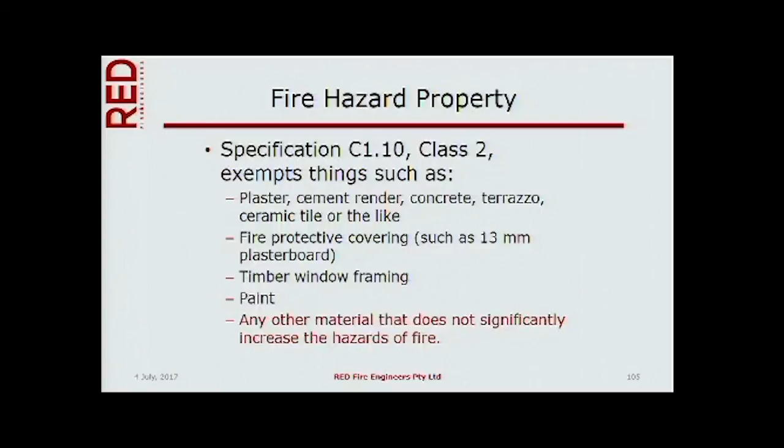We're trying to do what? Keep our cities from burning down. If we were in another state, then we would also allow any other material that does not significantly increase the hazards of fire. This is Victoria, and that provision of the building code has been removed. I don't know why they don't trust us.

The next item, there's not enough of you smiling. Come on, I have a bit of a sense of humor.

The second, so that's the first, is it combustible or not. The second is you're not allowed to use an attachment if it will make an exit unusable in case of a fire. So if I have an attachment over here, and I have an exit over there, do you think a fire over here is going to make that exit over there unusable? Probably not. But if the attachment moves closer, at some point it will make that exit unusable, particularly if it's over the exit.

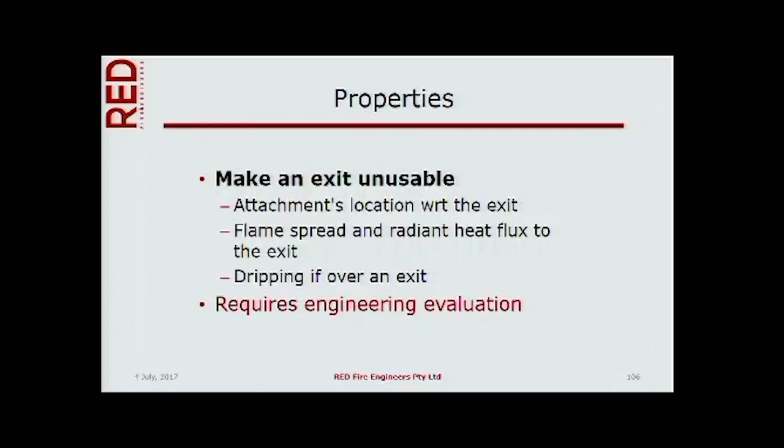How close is too close? Perhaps you need to have an engineer evaluate this. But this is weird - this is deemed to satisfy, and building surveyors do deemed to satisfy. They don't go to engineers for an opinion usually. Well, maybe they need to.

The third and final requirement for an attachment is that it not constitute an undue risk of fire spread via the facade. Think of Grenfell.

Before they put the facade on, they had a building that had been in existence for 30, 35 years. And that building, basically the wall, was a concrete wall. So what was the cladding that burned? It was an attachment from a BCA perspective. But would it be allowed under deemed to satisfy? No, there was an undue risk of fire spread, as we saw.

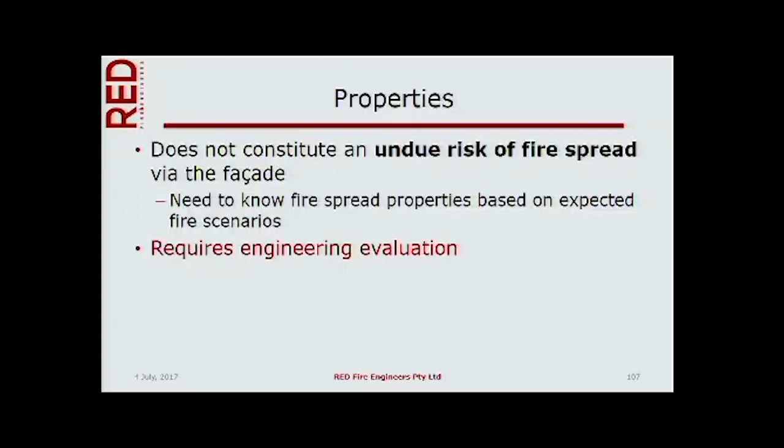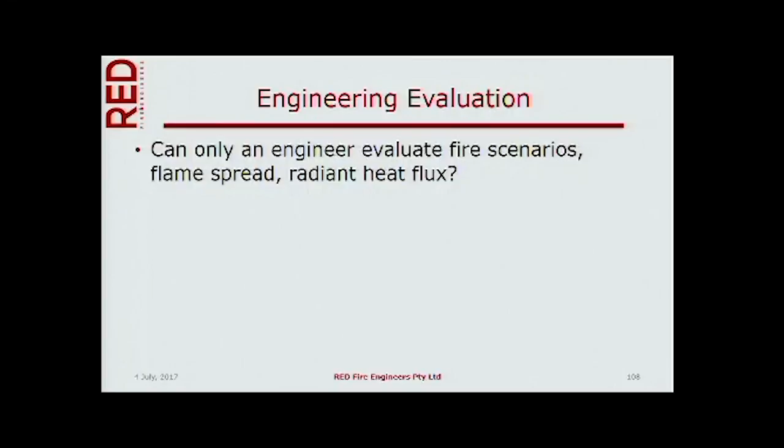How do you determine that? Well, you have to know something about fire spread properties and fire scenarios, and this requires a fire engineering evaluation. Can only an engineer evaluate fire scenarios, flame spread, and radiant heat flux? I'd ask the architect, but I don't want to ask him if he can do radiant heat flux calculations. No, he said no. Good, thank you, gave the right answer. The point is this is one of those weird, strange provisions in the building code that requires an engineer.

All right, so that's the deemed to satisfy world. And in my last 20 minutes, I'm going to talk about the fun world, the non-deemed to satisfy. So there are basically five provisions in the building code.

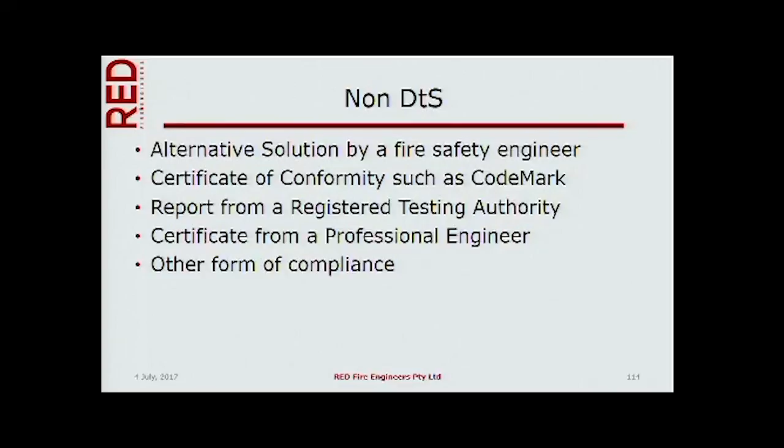You can do an alternative solution, also called a performance solution, by a fire safety engineer. You can have a certificate of conformity, such as a CodeMark. You can have a report from a registered testing authority. You can have a certificate from a professional engineer, and there's some other forms of compliance.

I'm going to talk about CodeMark very, very briefly. This is where you have a third party that evaluates and certifies products, not for your building, but general certification. The ABCB has a register of these certified products, but they don't check to see if any of the products actually work as certified. What they do is make sure that the companies writing these certificates are trusted.

There may be certain restrictions. It's really interesting because the CodeMark is sort of a universal opinion written for a particular product that can be used really for almost any building. It's viewed by many as part of deemed to satisfy, but it's not - it's actually a separate item in the building code.

The trick with CodeMark is that products must be exactly the same as described. They must be installed exactly as specified, and every limitation in the CodeMark certificate has to be met. I was talking to some architects the other day, and they said, we've never done that, we've always deviated a little. I said, well, then you voided all your code marks. Oh, we didn't realize that.

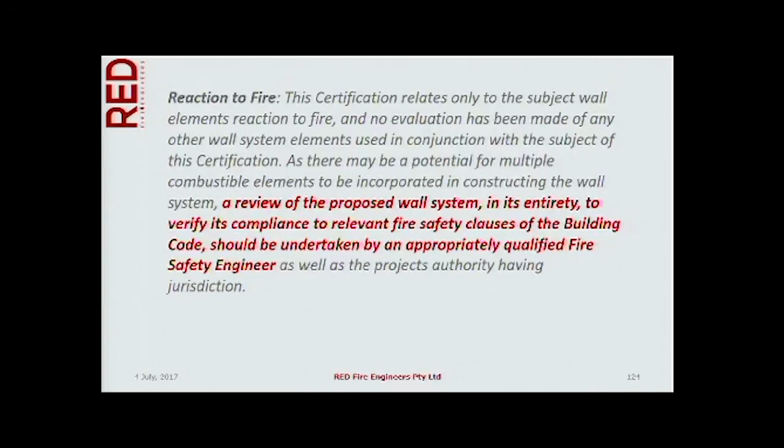Well, okay, moving right along. Everyone got very quiet. There are a couple of other resources. The VBA has an industry alert. CSIRO has a guideline that they're updating.

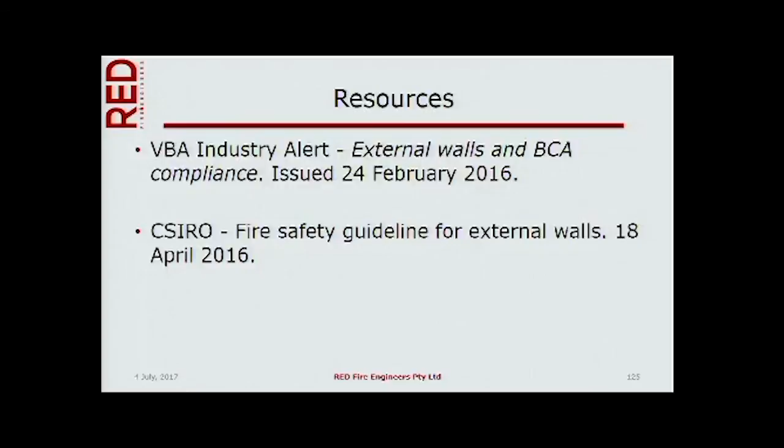So I now want to take the last 15 minutes and talk about performance solutions. This is where I, as a fire safety engineer, have fun. It's where I make my living. When I develop a performance solution or an alternative solution, I start by evaluating the hazard, and then I evaluate the expected performance of whatever it is I'm looking at, whether it's an egress system or facade.

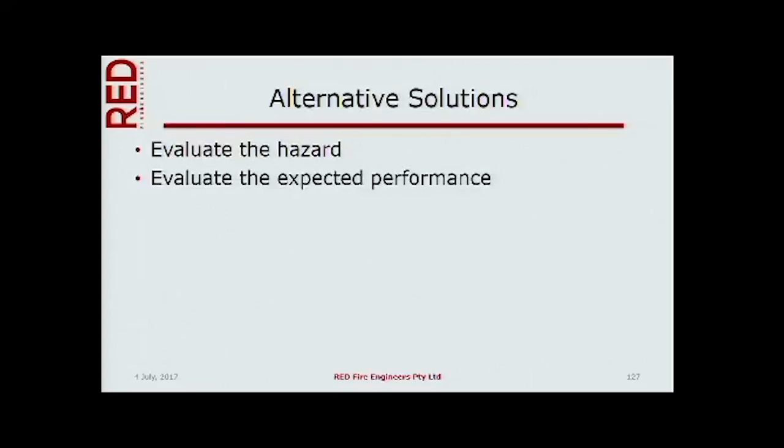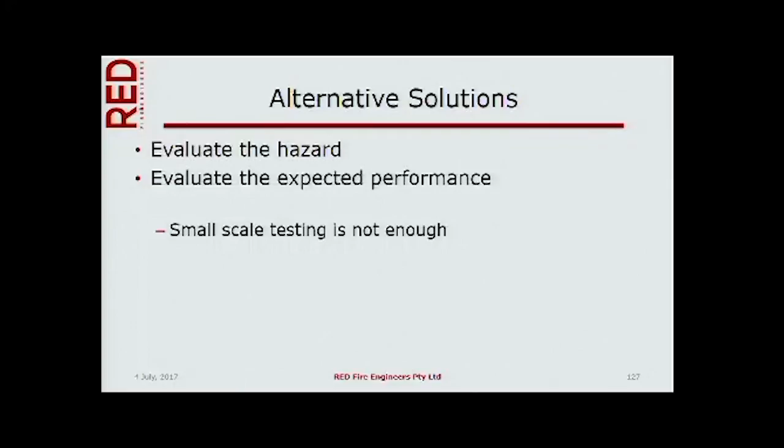If it's facade, for me to do this evaluation, I need large-scale facade test performance data. Small-scale testing is not enough. What am I telling you? If you want me to check if it's going to work, you're going to have to give me information which will have cost you money. Sorry.

What do I mean by large-scale tests? ISO has sort of the granddaddy of tests, ISO 13785. By the way, you need to be very careful. There's a Part 1 and a Part 2. Part 1 is a small-scale screening test. So if you pass part 1, you might pass part 2. If you fail part 1, you will not pass part 2, okay?

One of my clients came to me and said, I've got an ISO 13785 certificate for this cladding, can I use it? And I looked and it said part 1. I said, well, where's the part 2 certificate? Checked with the manufacturer. Oh, we don't have one. Well, why didn't they? All right. So that's actually only a small-scale test that they passed. They didn't pass what I really needed to know if the product would work.

There is a British standard, BS 8414. In this case, though, for the standard, part 1 and part 2 is for different substrates. This is a very important test because it's sort of the basis of the Australian standard 5113. We'll talk about that in just a second.

There's an American test. It's been around for 20 years. But unlike the British test or the ISO test, it doesn't have a wing wall. It's just a flat surface. So if your facade is flat, just a single plane, it works great. That's why they haven't had a lot of facade fires in America. But if you have a complex, modern facade, really cool things that facade engineers are developing these days that make buildings attractive, that test is not enough.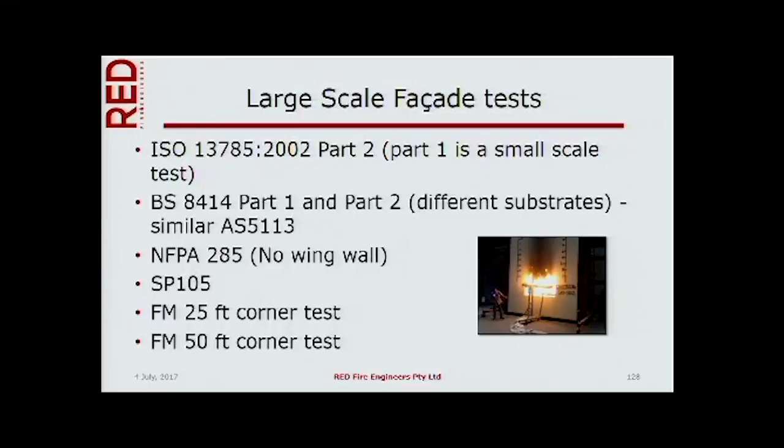Now it's an insurance company test. The other tests really look at building safety and people safety, etc. The insurance test is looking at property protection. Guess what's the more severe test? The insurance test. So if you actually get something that meets the FM Global standard, it's probably a better product from a fire viewpoint than something that meets one of these other test standards, even though it's talking about feet instead of meters.

All right, here's the British test. Basically, you build a wall with a corner. This is 2 meters, this is 6 meters high or higher.

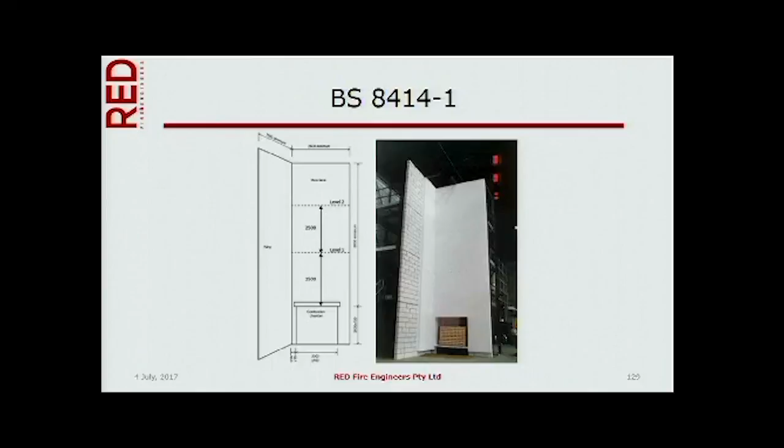The test apparatus has been used for quite a few years in the UK, and it is available here in Australia. Exova is the only lab that can do these tests at the moment. CSA down in Dandenong do it outside, waiting for a day when it's not windy and not raining - I don't know when they find that in Melbourne, but that's all right. CSIRO will be building such an apparatus, but they have to do pollution controls, so they have some limitations on what they can do.

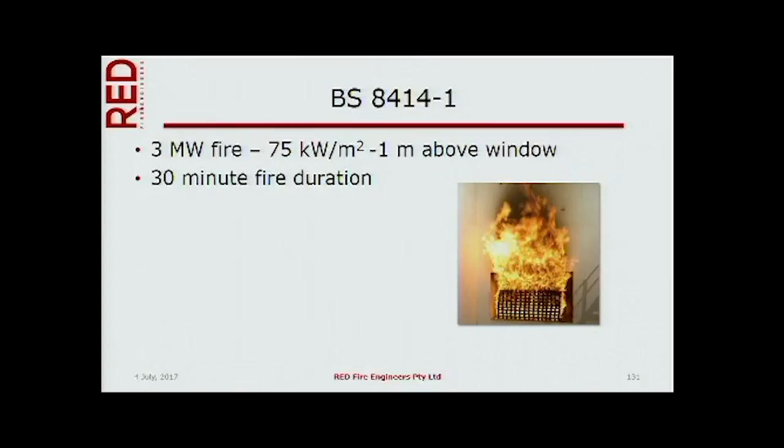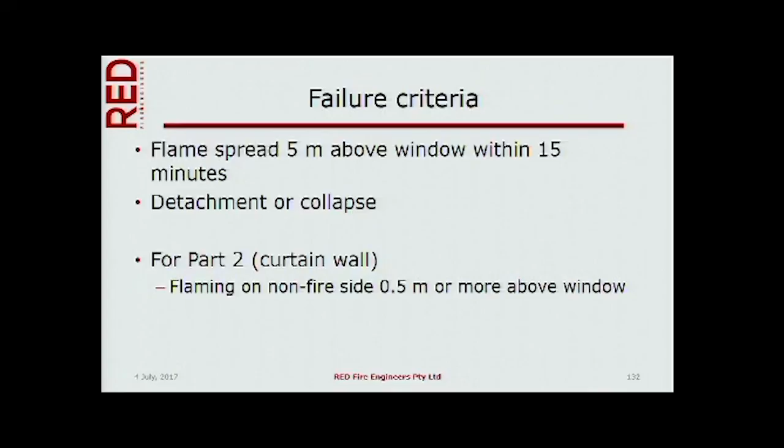It's a big fire, and you basically look and see what happens. The fire is a wood crib, 3 megawatt fire, where you get a heat flux of 75 kilowatts per square meter - that's a lot of heat - a meter above the window. You let it burn for 30 minutes, and you look to see how far the flame has gone, and whether the facade has detached or collapsed. Part 2 is where you do a curtain wall, and you look to see if the fire's gotten behind the wall.

So we do have an Australian standard. It's very similar, a little bit different - we put the thermocouples somewhere else. Why would we do that? We're Australians, come on. Yeah, exactly. And in fact the British do have it wrong because they don't follow the ISO procedures, where we do.

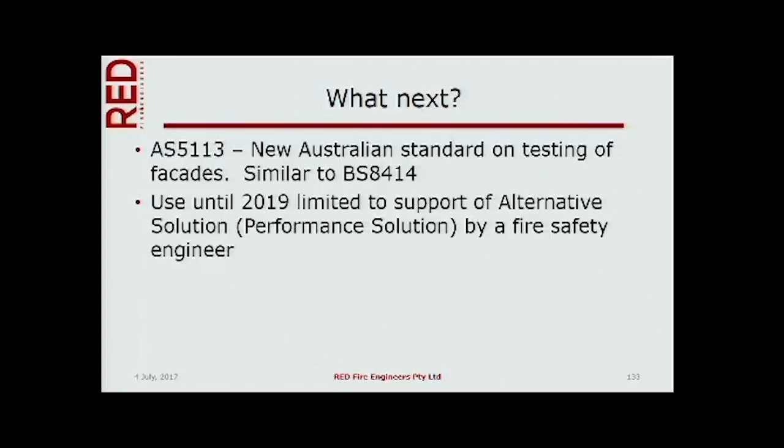Until 2019, the test, because it's not in the BCA, can really only be used by a fire safety engineer to support an alternative solution. It's not something you could say, 'I've gone ahead and had this test conducted, and now I can use my product' - no, it can only be used by a fire engineer. In 2019, I expect we will either see it in the building code, or it will be referred to in the building code as a verification method or something like that.

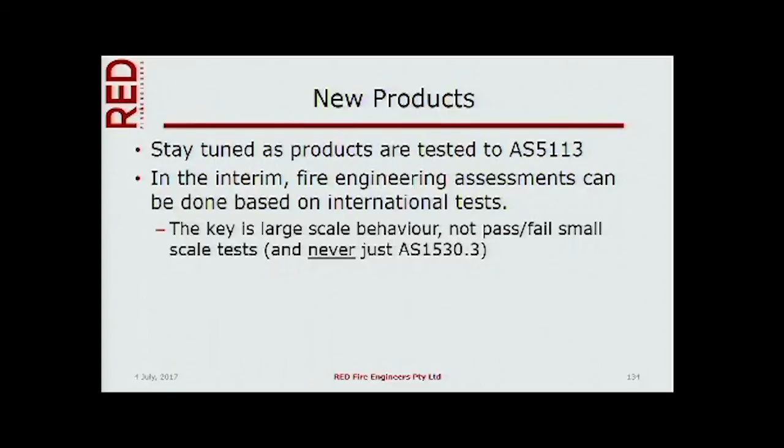So stay tuned - more and more products are being tested to 5113. In the interim, until they are done, fire engineers have to use international test data. I can use the American test, for example, if my facade is boring, if it's flat, but if it's interesting, I probably need the British test. The key to all of this is I need large-scale behavior and not traditional pass-fail, small-scale tests, and never just AS1530 Part 3 - this is an Australian-developed test standard which actually is for ranking of materials, but doesn't tell you anything about how they really behave in a fire.

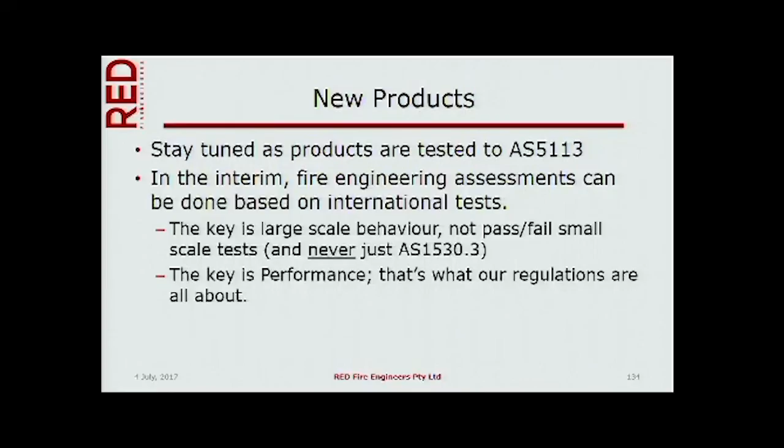So you can't take test data and say, based on those numbers, I can predict how something will burn in a room. You can see if something's worse than something else, so you can rank it, but you can't actually predict large-scale behavior. The key is performance - that's what our regulations are all about.

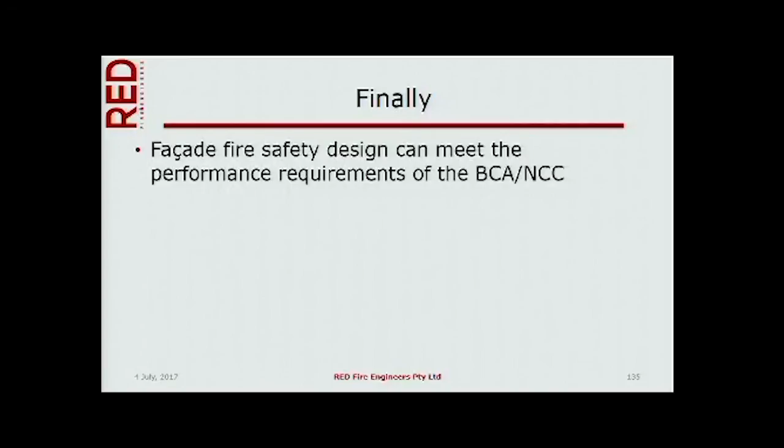So facade fire safety design can meet the performance requirements. We don't always have to comply with the BCA's deemed-to-satisfy requirements as long as we meet performance. We haven't always done it, and not all non-compliant designs are unsafe - they might need to be evaluated by a fire safety engineer. Fire safety engineers have the tools and knowledge to ensure building designs can achieve an appropriate level of fire safety. They just need to be hired and asked to look at that.